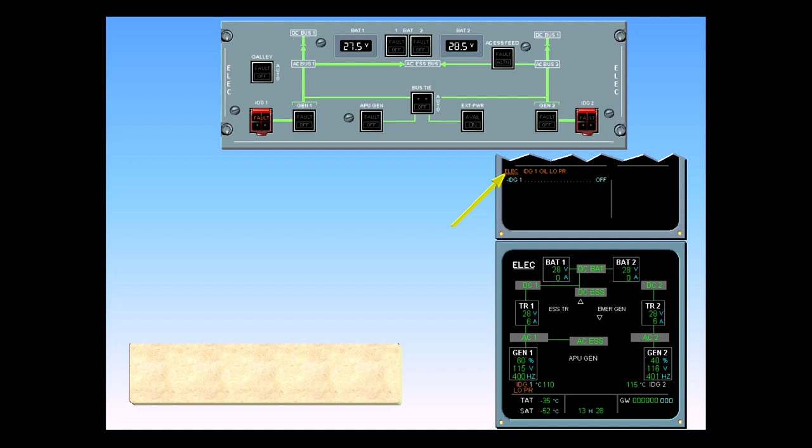Observe the amber IDG low pressure on the Ecam electric page and the amber IDG1 fault light on the electric panel.

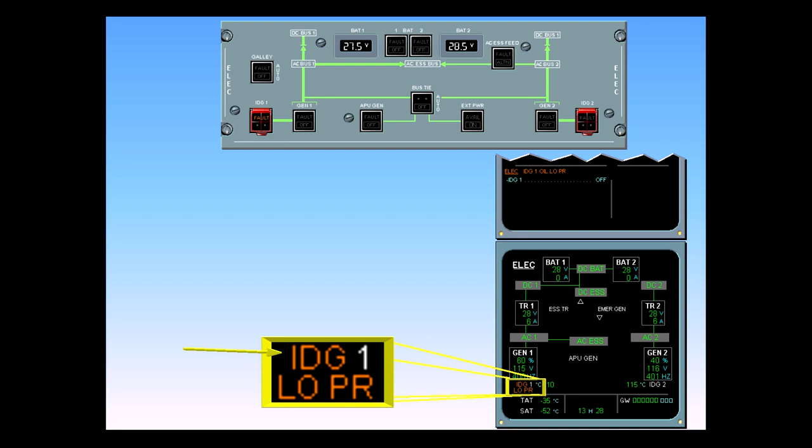These indications mean that there is insufficient oil pressure in IDG1. Ecam action requires us to disconnect the IDG. Begin Ecam action by raising the IDG guard.

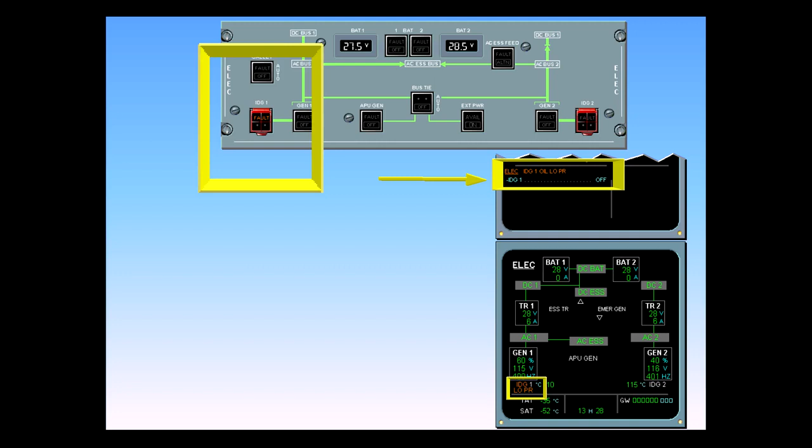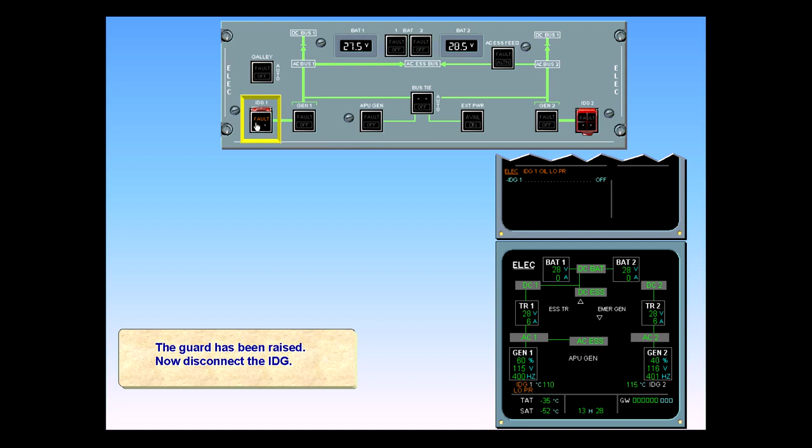The guard has been raised. Now disconnect the IDG. Caution! Press the IDG push-button switch until the generator fault light comes on, but not more than 3 seconds, to avoid damage to the disconnect solenoid.

Generator number 2 has automatically taken over the generator number 1 load through the AC tie bus and is now supplying the entire electrical system.

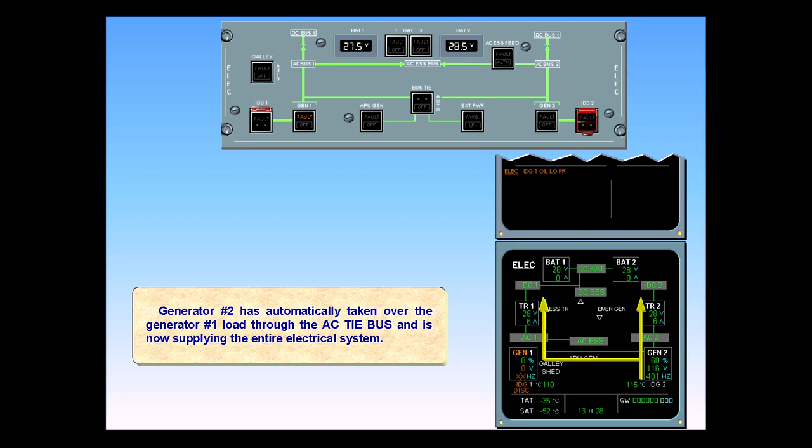On the Ecam electric page, an amber disconnect has replaced the previous low pressure, signifying that IDG number 1 is now disconnected. The IDG number is shown in white to indicate that engine 1 is still running.

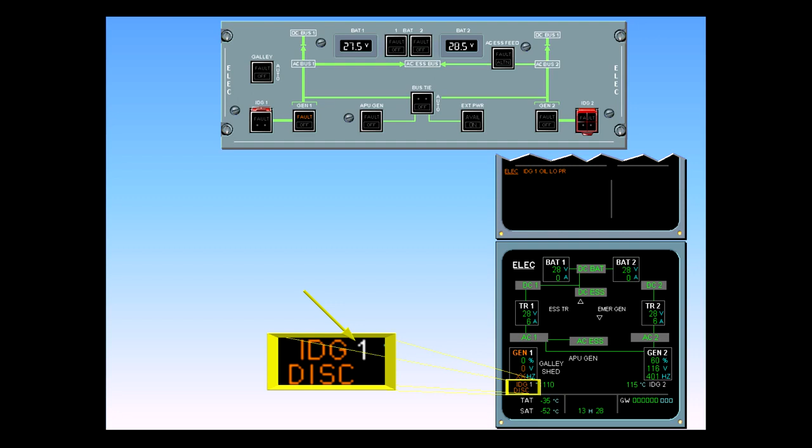Let's look at generator 1 indications for a moment. GEN in amber means generator 1 has abnormal parameters.

One in white means engine 1 is still running. 0% load in green means that the load is still within the normal range.

0 volts in amber means that the voltage is outside normal parameters. Amber X's means that there is no frequency sensed.

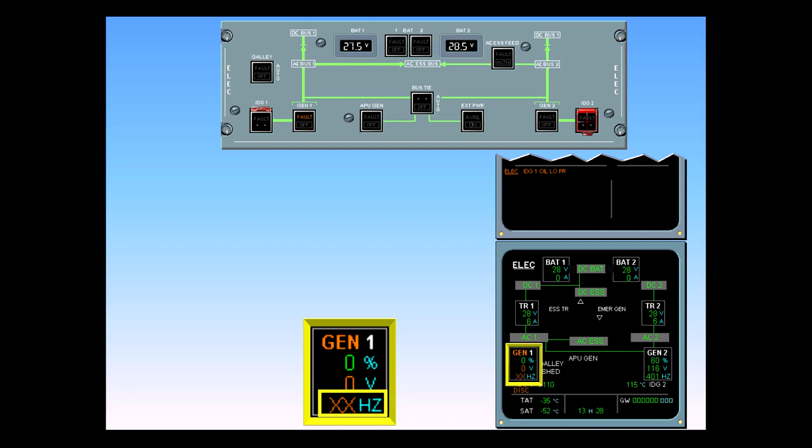The amber fault on the generator 1 push-button switch means generator 1 is not supplying the system.

On the Ecam electric system page, galley shed in white has illuminated, indicating that the system has automatically shed galley equipment to decrease the load on the remaining generator.

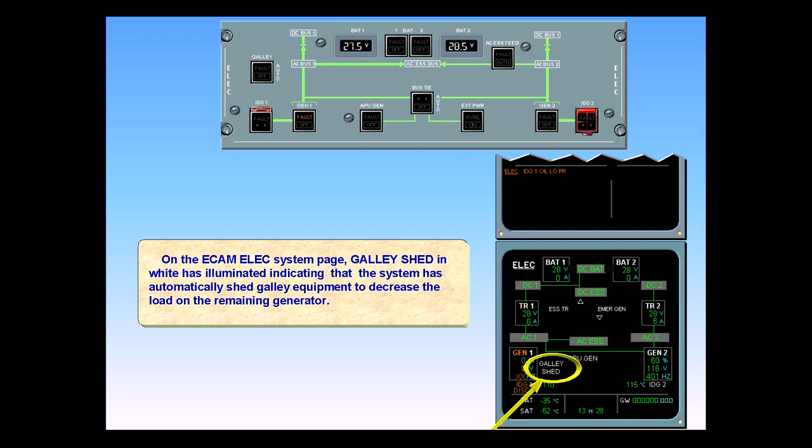After review and confirmation, clear Ecam.

The status page is now displayed. A green message advises us that the APU generator is available as a backup up to flight level 350. Using the APU would restore the galley power.

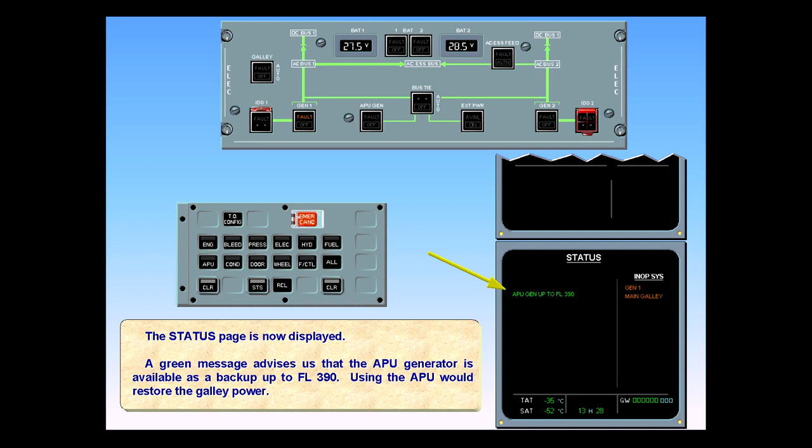In the INOP system column, generator 1 and the main galley are listed as inoperative. After review and confirmation, clear status.

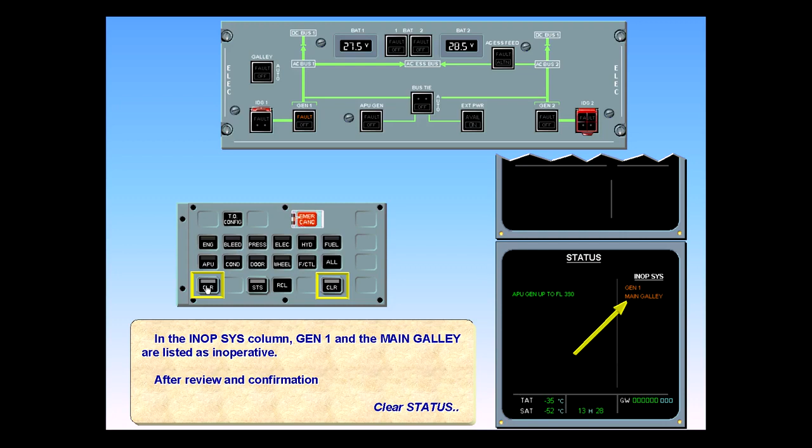Ecam complete, screens normal. The system display has reverted back to the cruise page.

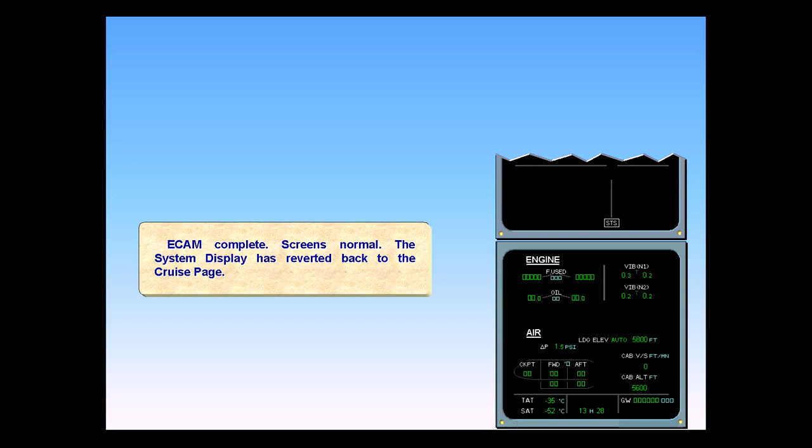On the engine warning display, read the title of the failure.

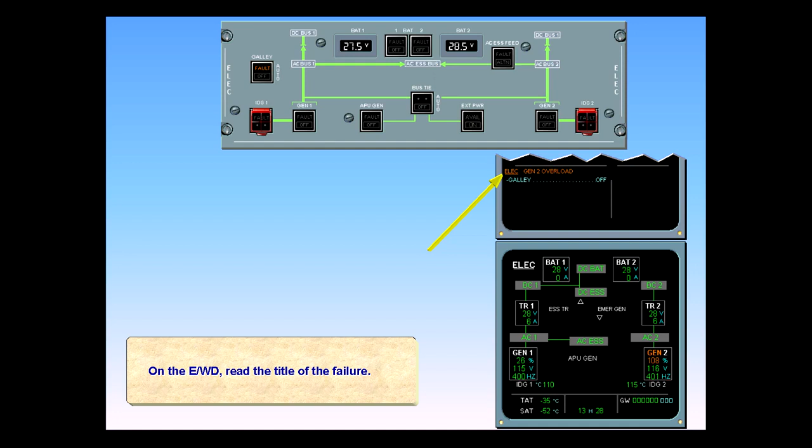Observe generator 2 load indications in amber on the Ecam electric page, indicating that the load is abnormal. Galley fault light illuminated on the electrical panel, helping you to locate the proper switch.

The galley will be switched off to reduce the load. Notice that there is no fault light in the generator 2 push-button switch because the generator is still powering the AC bus 2.

The first Ecam action calls for the galley power to be switched off. Turn off the galley power.

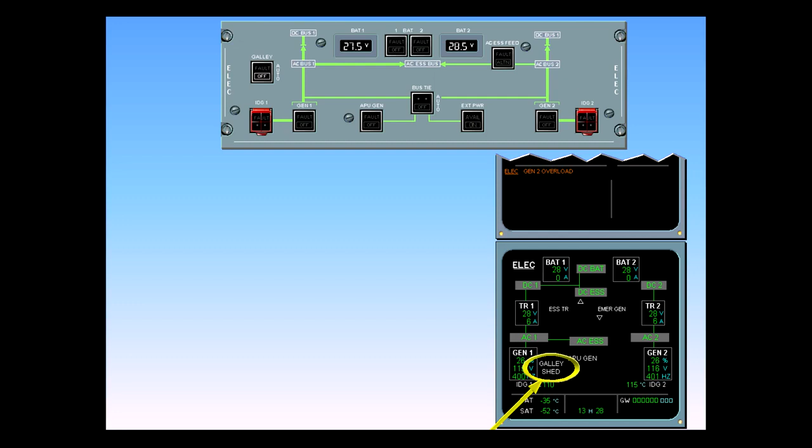On the Ecam electric page, note that galley shed indication has appeared. Generator 2 load is back to a normal value.

After review and confirmation, clear electric.

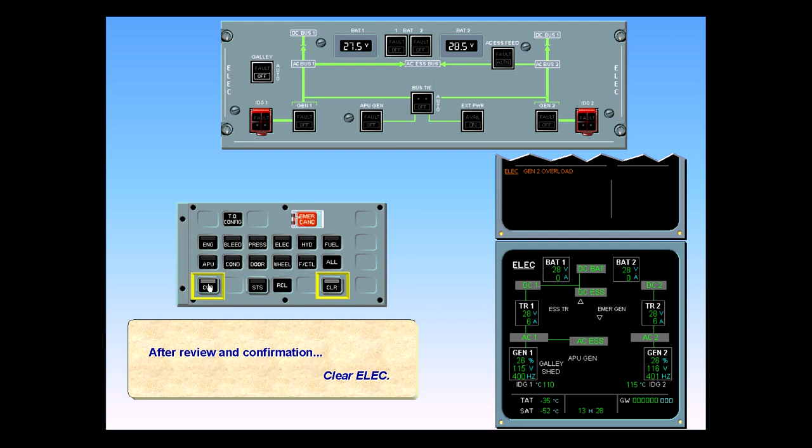The status page is displayed for review. The only inoperative item is the galley.

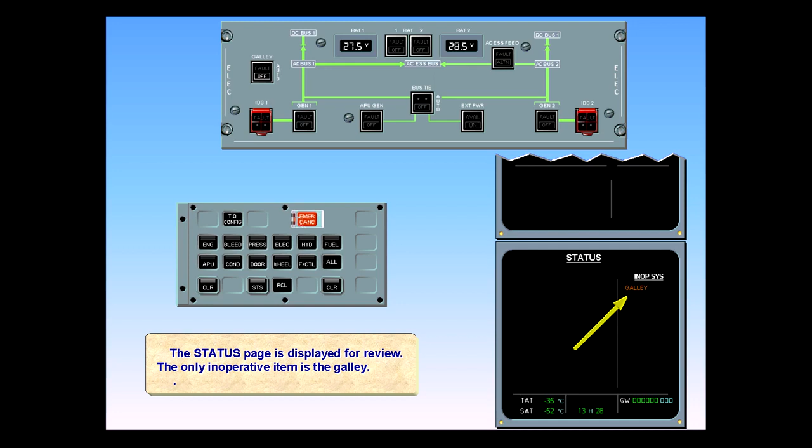After review and confirmation, clear status.

Ecam complete. Screens normal. The system display has reverted back to the cruise page.

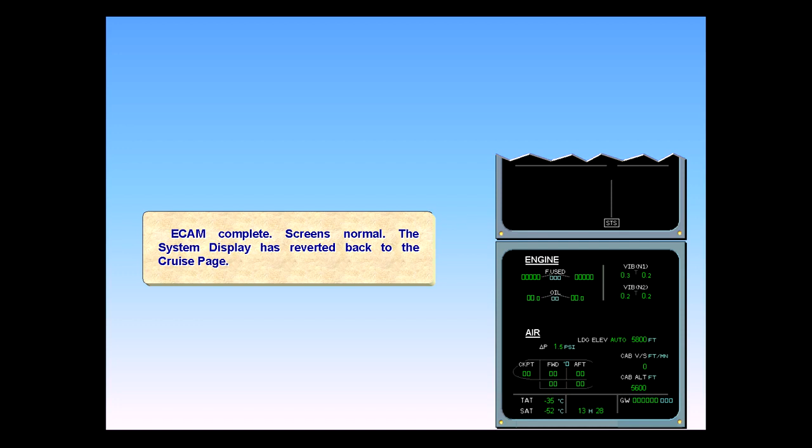This is a serious failure which results in a master warning.

Normally, AC Bus 1 supplies the following: the AC Essential Bus, DC Bus 1, which in turn feeds the DC Battery Bus, the DC Battery Bus, which normally feeds DC Essential.

If AC Bus 1 is lost, these buses become unpowered.

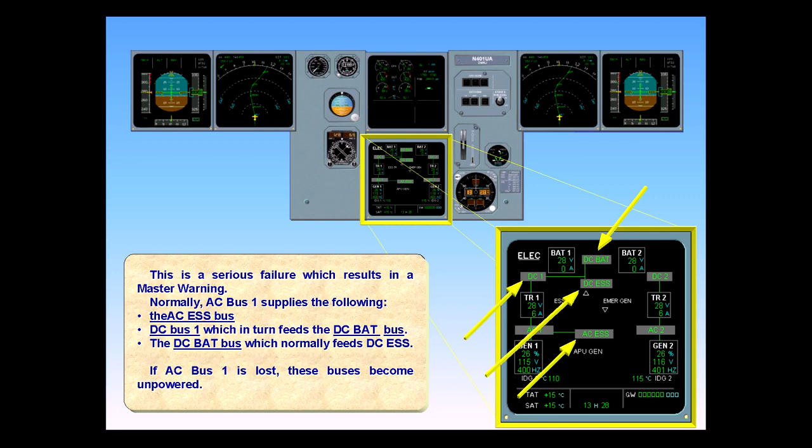When power is lost to either DC bus, the DC tie bus relay automatically closes and repowers the dead bus. In this case, both DC1 and the DC battery bus are repowered by TR2 through DC2.

However, with the loss of AC Bus 1, AC Essential and DC Essential both remain unpowered.

The most noticeable consequence is that the captain's PFD, ND, and the engine warning display go blank. Since the captain has no instruments, he should give the aircraft to the first officer and perform the Ecam himself.

The EWD and the Ecam checklists are now displayed on the lower Ecam. The first item is the autopilot.

It can be cleared either by clicking twice on the autopilot disconnect on the side stick or by using the clear key on the Ecam control panel.

For this exercise, use the clear key. Clear auto flight.

The first item, autopilot, has disappeared. Looking at the remaining lines, we can see that the AC Bus 1 fault has led to AC and DC Essential Bus failures.

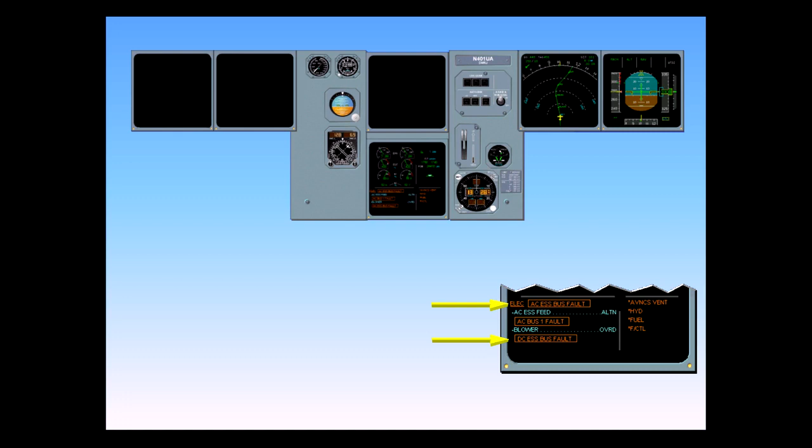The first blue line in the procedure tells us to switch AC Essential Bus from AC Bus 1 to AC Bus 2. This will repower the AC Essential Bus.

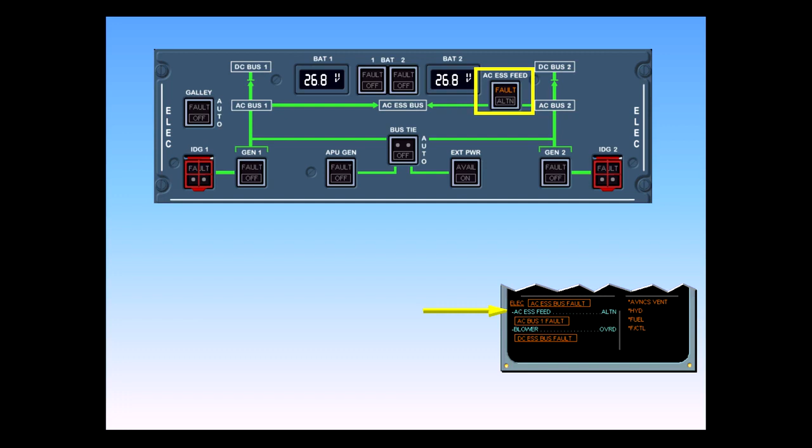At that point, AC Essential will power the Essential TR, which will in turn repower the DC Essential Bus.

Note the amber fault light in the AC Essential feed switch. This amber light is also telling us to operate the switch. Perform Ecam action.

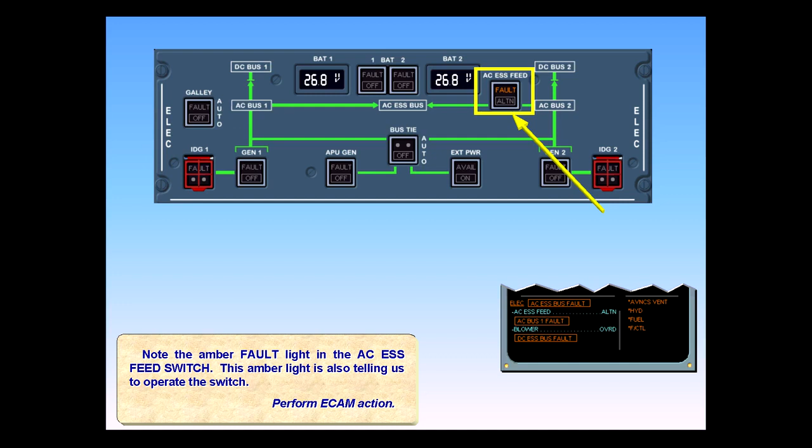The amber fault light has now been replaced by a white alternate light. This means that the AC Essential Bus is now powered by its alternate source, AC Bus 2.

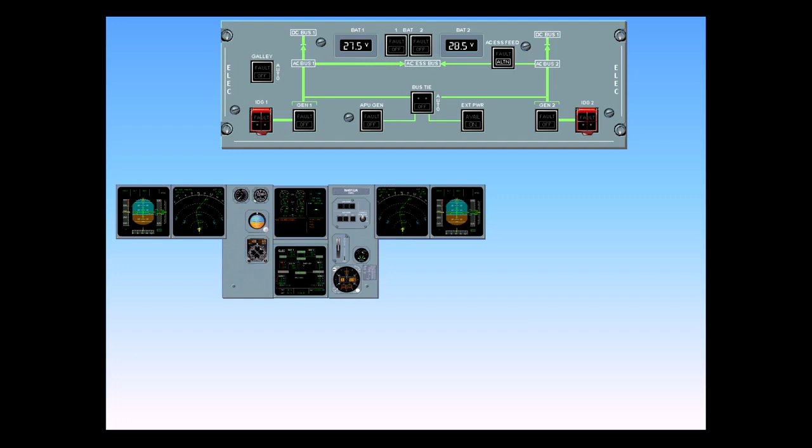After a few seconds, the captain's PFD and ND and the EWD are recovered. The Ecam electric page is then automatically redisplayed on the lower Ecam.

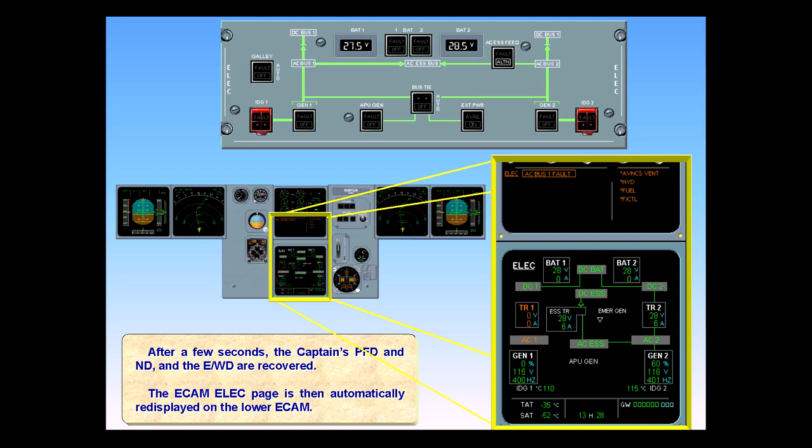Both essential buses are now recovered. AC Bus 2 is now supplying the AC Essential Bus, which in turn is powering the Essential TR. The Essential TR then powers the DC Essential Bus.

In normal operation, the Essential TR is unpowered. Although it is labeled, the box symbol has no parameters listed. Now that it is in use, it's showing both volts and amps.

As long as these parameters are in the normal range, they will be displayed in green. Should one or both become abnormal, the display will change to amber.

The only bus which remains unpowered is AC Bus 1.

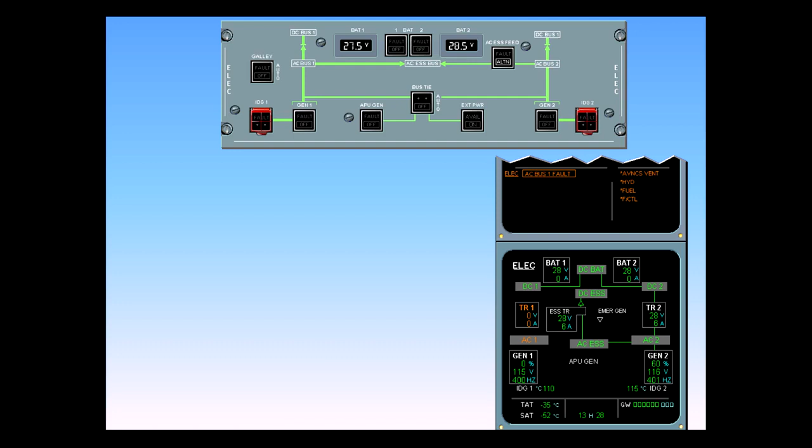Listed on the right side of the EWD in the memo area are those systems affected by the loss of AC bus number 1. At this point, you will clear the electric page. Clear electric.

Normally, at this point you will start to review the Ecam pages relative to the secondary failures: avionics, ventilation, hydraulics, fuel, and flight control pages. However, we will bypass the rest of the procedure since those pages relate to different systems.

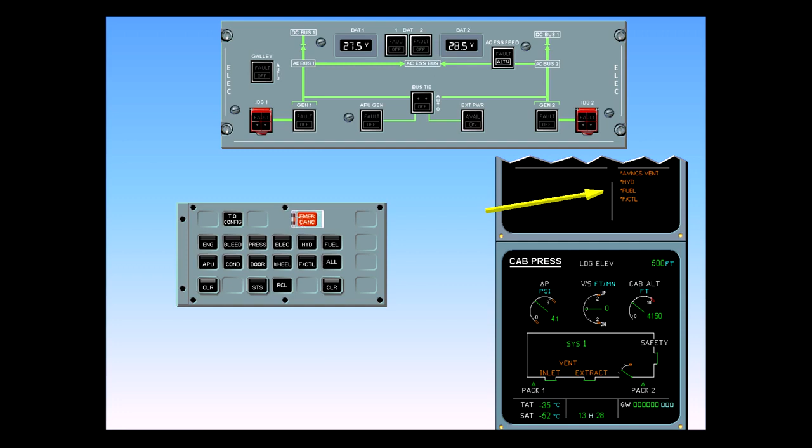We will now study the electrical emergency configuration. As there are a lot of events which happen at the same time in the aircraft, we will present them in a sequential order. Let's assume we are in flight and no previous faults have occurred.

The RAT automatically extends if both AC buses 1 and 2 lose electrical power above 100 knots, unless the aircraft is on the ground.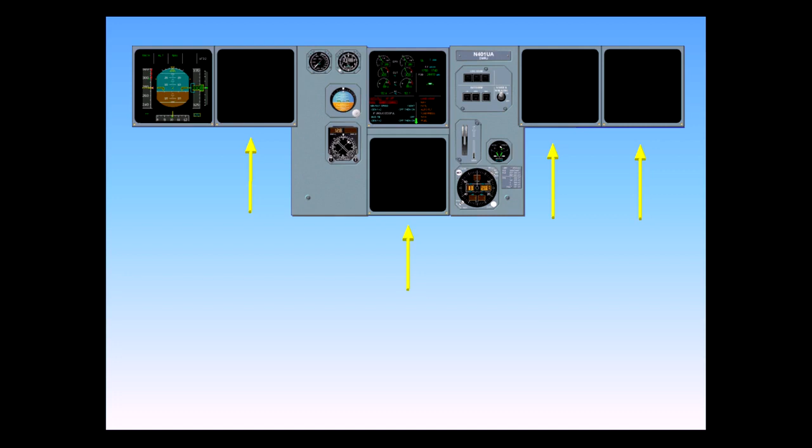The SOPs recommend in such a case that the captain will fly the aircraft, while the first officer does the ECAM action.

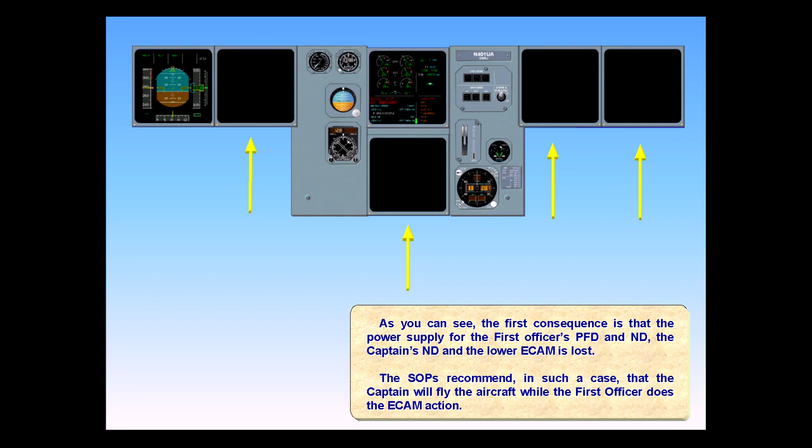First, let's look at the sequence of events regarding the various electrical configurations during RAT operation on the A320.

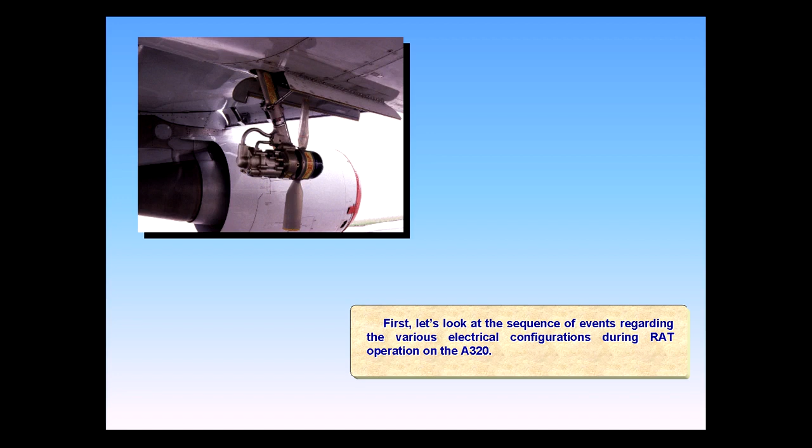During RAT extension, Battery 1 powers AC Essential through the static inverter. Battery 2 powers DC Essential directly. The shed buses are not powered.

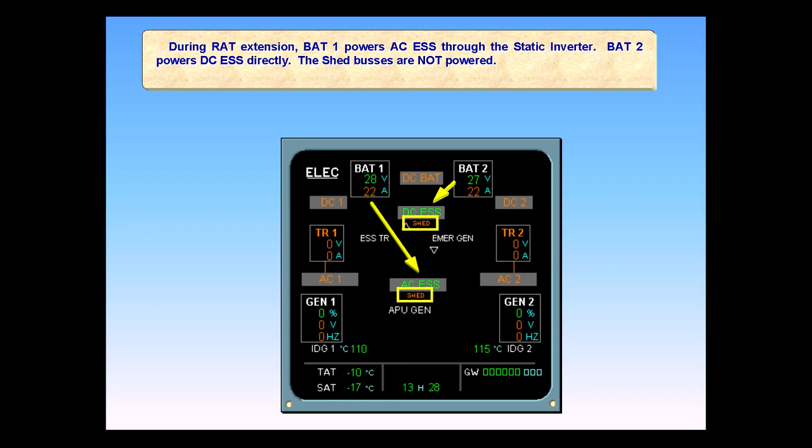After the RAT has extended and the nose gear is up and locked, AC and DC Essential and AC and DC Essential shed buses are powered.

On the 320 only, when the gear is extended, the RAT generator drops offline and the batteries again power AC and DC Essential. The shed buses again are not powered.

Note, on the 319 and the newer 320s, the RAT generator remains powered even after gear extension down to 125 knots on the ground.

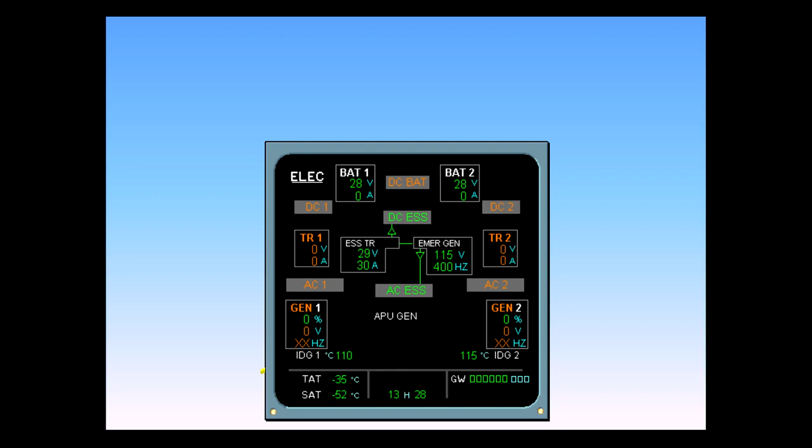On the ground below 100 knots, both batteries automatically connect to the DC battery bus. Below 50 knots, AC Essential is no longer powered, and the CRTs are lost. Only DC Essential remains powered, providing communication capability.

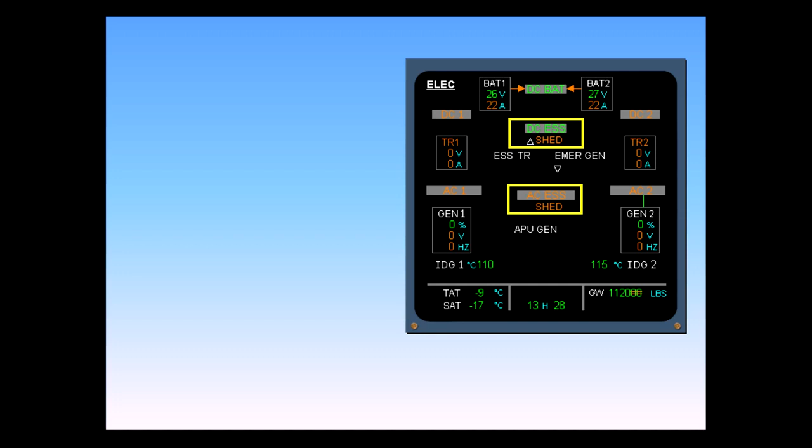We will now look at cockpit and ECAM indications during the emergency electrical configuration.

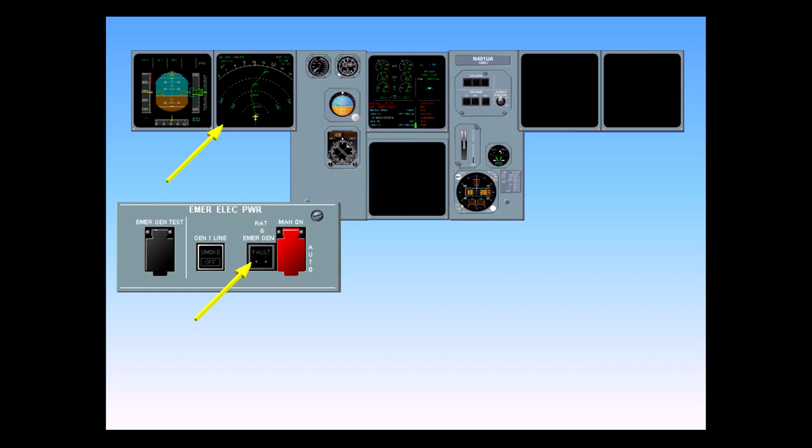The light has extinguished and the emergency generator is now supplying the system. Notice that the captain's ND has been restored. Several important items are restored with the operation of the emergency generator: the captain's ND, MCDU, DME, ADF, and the transponder.

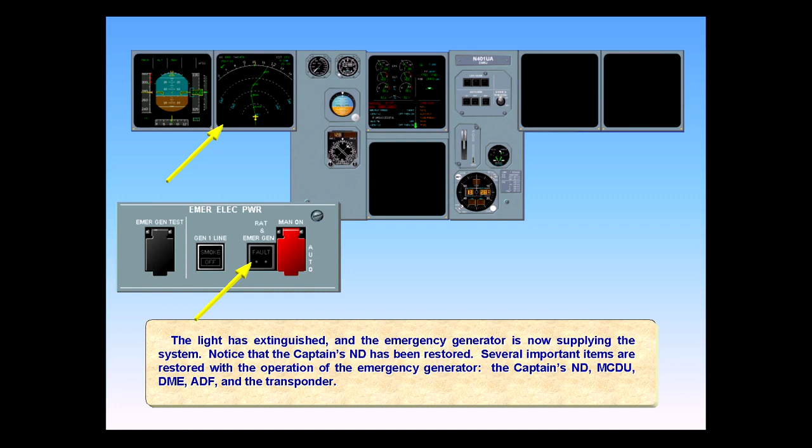The first line on the EWD deals with the autopilot. To continue with the procedure, you must first clear this line. Clear autoflight.

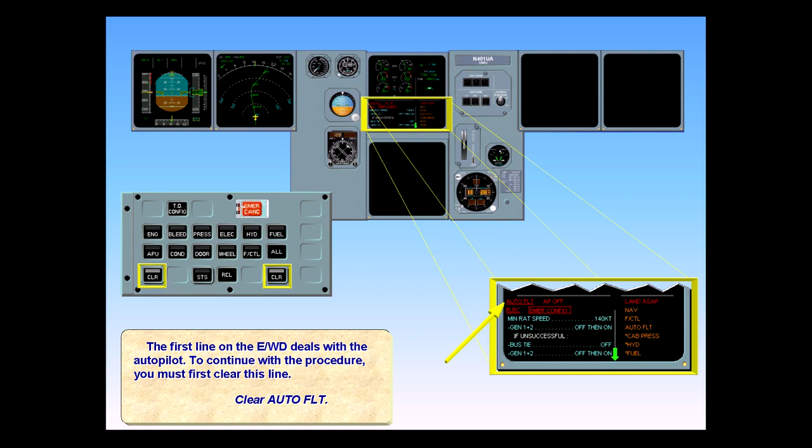Read the title of the failure. The red Emergency Config title means that you are in an electrical emergency configuration.

Note the red message in the memo portion of the Ecam: land ASAP. Both generators have been lost.

The only electrical power available right now is the RAT and the batteries. Therefore, it is recommended that a landing be made with reasonable haste.

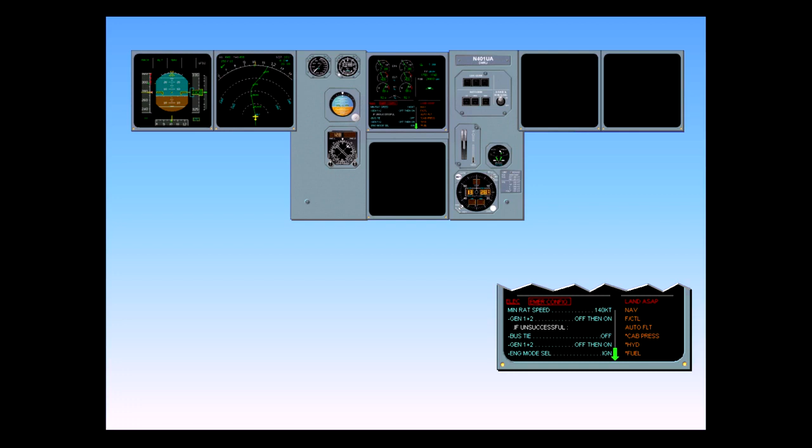Note the minimum speed of 140 knots with the RAT extended. Below this speed, the RAT will stall, leading to the aircraft being supplied by batteries only.

The first action is an attempt to reset the generators.

The reset has not been successful. Before continuing, let's review the Ecam system. Should any one Ecam screen be lost, the priority is to the EWD.

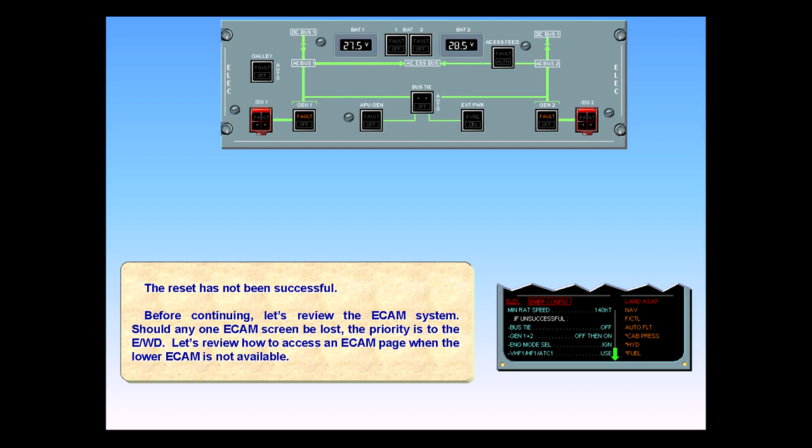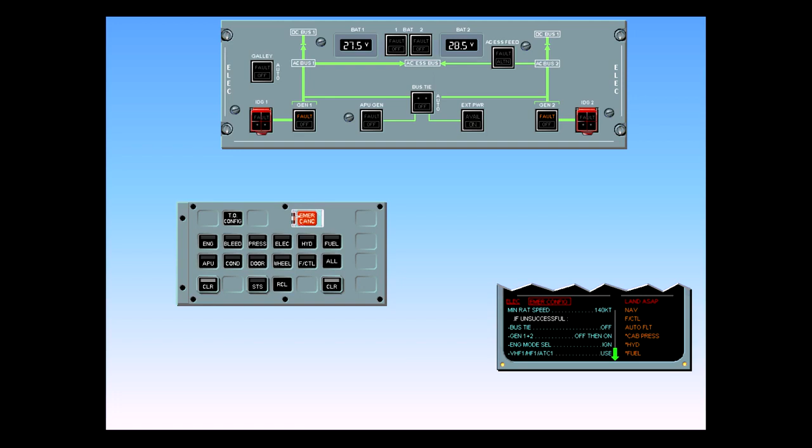Let's review how to access an Ecam page when the lower Ecam is not available. An Ecam page can be displayed on the upper Ecam by pressing and holding its associated push-button switch on the Ecam control panel. The switch must be held, otherwise the display will revert to the engine warning display. Call the Ecam Electric page.

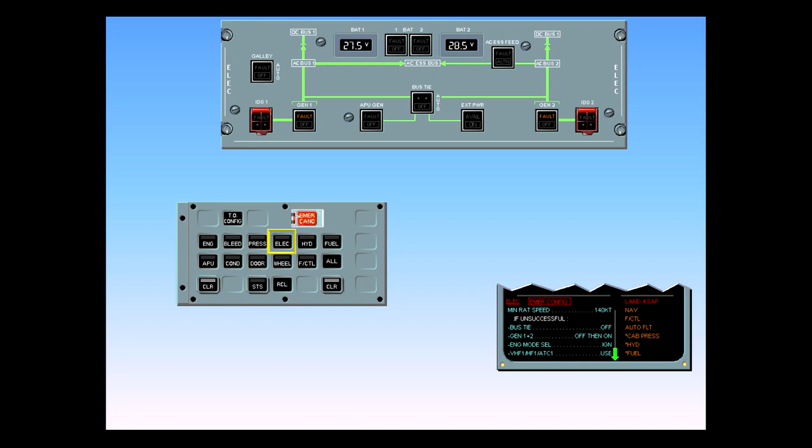On the electric page, note that the emergency generator supplies the AC essential bus, the essential TR, and the DC essential bus.

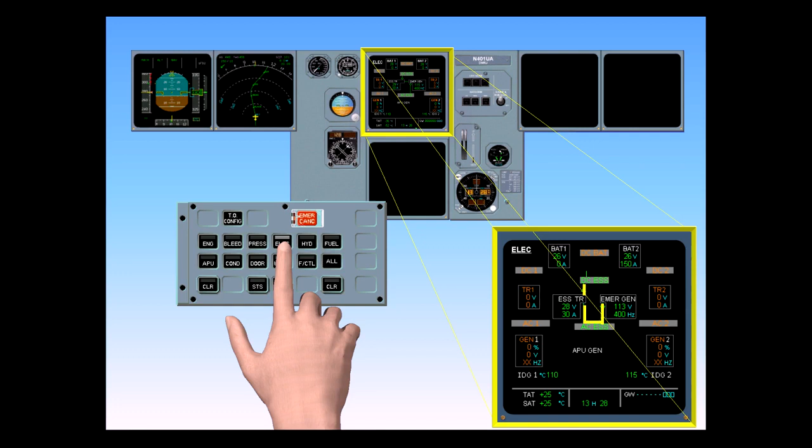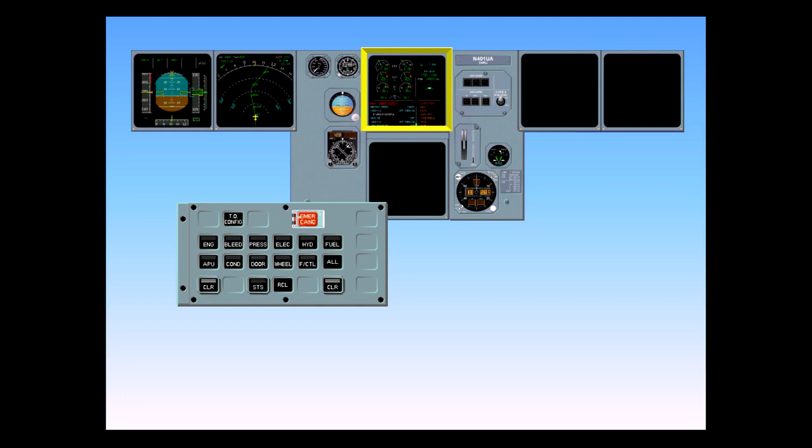By releasing the Ecam electric push button, the engine warning display is again displayed on the upper Ecam.

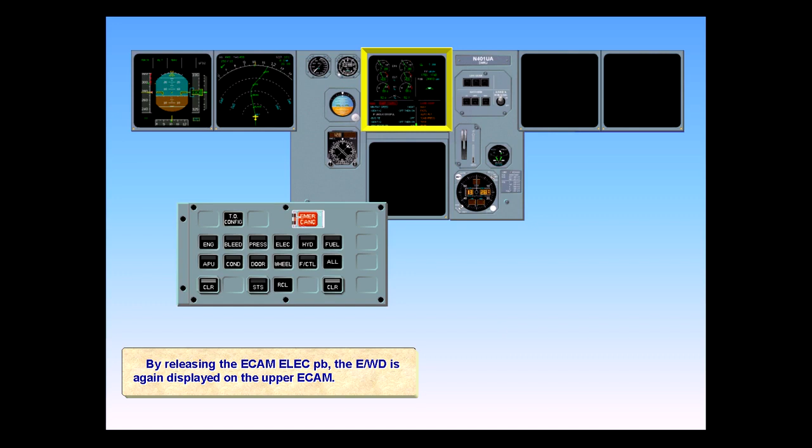Because the generator reset was not successful, we must continue with the procedure. The next item requires us to switch off the bus tie. Continue Ecam action.

Switching the bus tie off segregates the two sides of the system. In this manner, a short circuit can be isolated, thus allowing at least one generator to be reset. The procedure then calls for another reset of the generators.

Again, the reset of the generators has not been successful. Since the next steps concern other systems, we will stop here and look at the indications on the right side of the EWD.

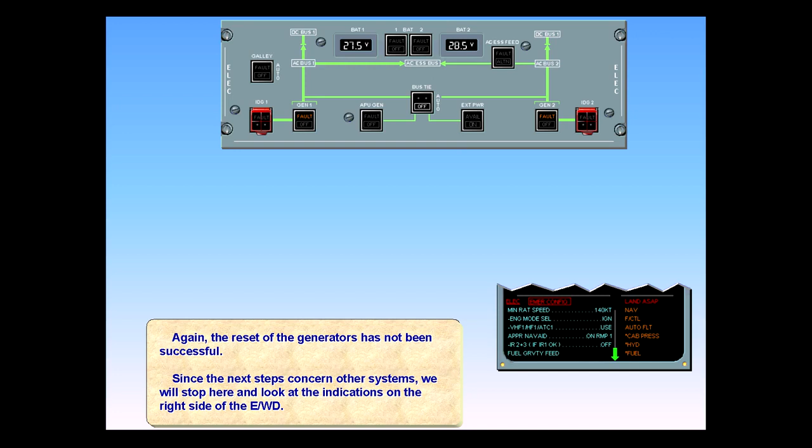Notice the amber nav, flight control, and auto-flight system titles. These systems are also affected by the failure. Their related procedures are stacked after the current one and will appear with the completion of the emergency configuration procedure.

Notice also the secondary failures concerning cabin pressure, hydraulic, and fuel systems. There may be other secondary failures that are not yet displayed, since there is an overflow indication, green arrow.

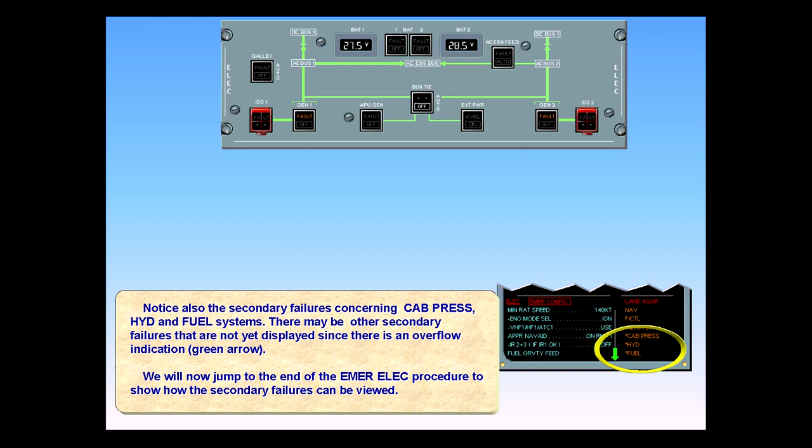We will now jump to the end of the emergency electric procedure to show how the secondary failures can be viewed. The list of secondary failures is visible.

Since the lower Ecam is not available, you must manually call the Ecam pages associated with the secondary failures on the EWD. Press and hold the related key on the Ecam control panel, ECP, in the same way that you previously called the Ecam electric page.

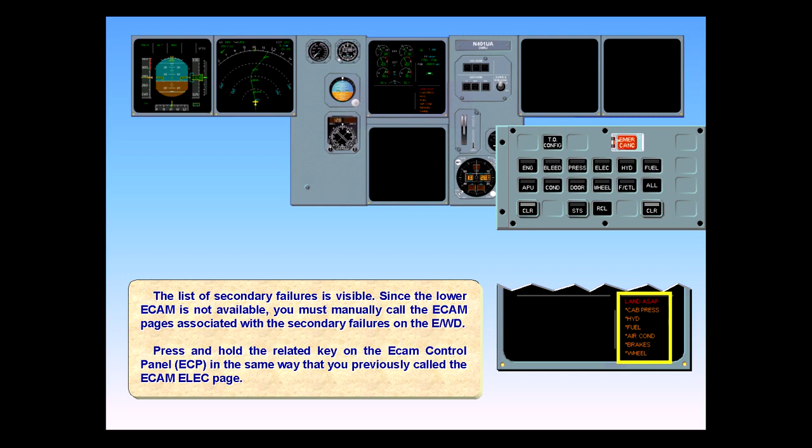We will now assume that all the Ecam pages of the secondary failures have been reviewed. When you cleared the last failure, the memo section was restored to normal. Note that there are now 5 memos that serve as reminders about systems that do not normally operate in this manner.

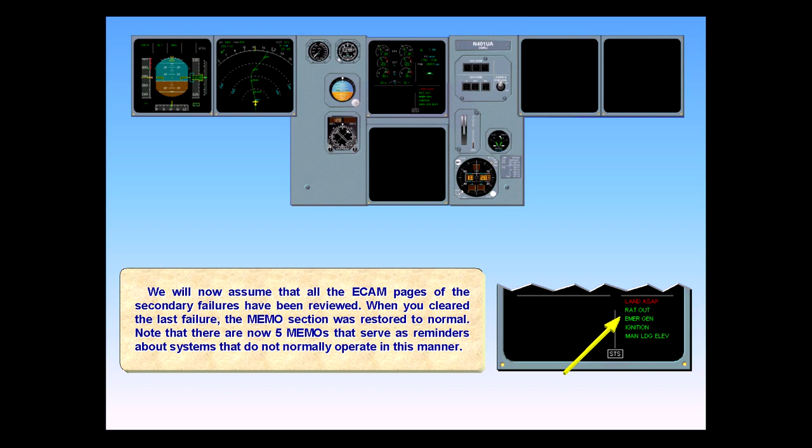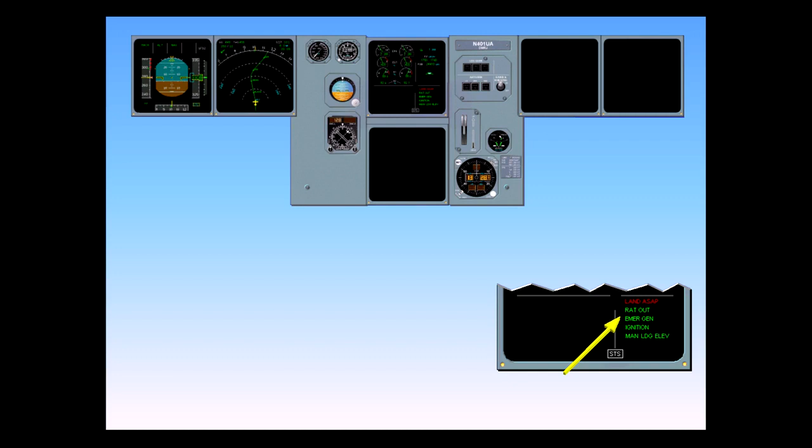In particular, the green Rat Out memo message confirms that the rat is no longer stowed, and the green emergency generator memo message indicates that the emergency generator is supplying the system.

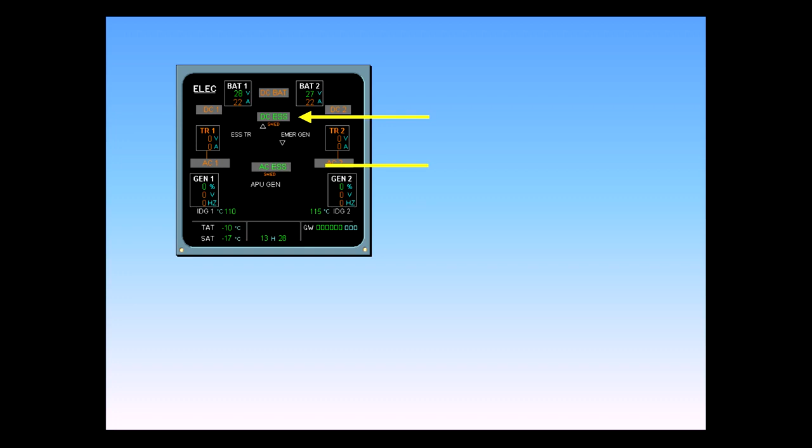The batteries feed the DC essential bus and, via the static inverter, the AC essential bus. Note that both buses are labeled in green, indicating that they are powered.

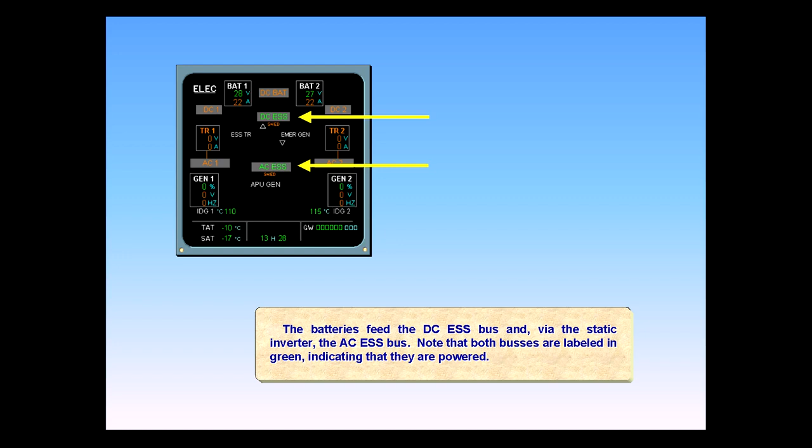Both shed essential buses are automatically depowered, indicated by the amber shed indications below their respective buses.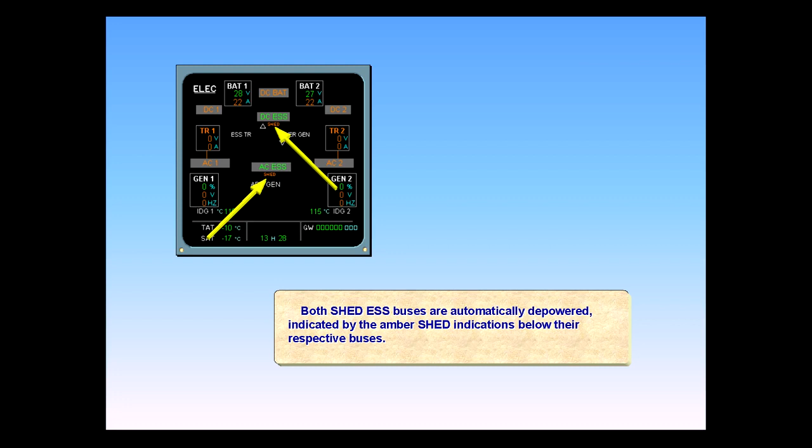If a dual electric failure occurs, the rat is automatically deployed. During the rat extension, about 5 seconds, the electrical system is powered from the batteries. The approximate flight time on batteries only is 30 minutes.

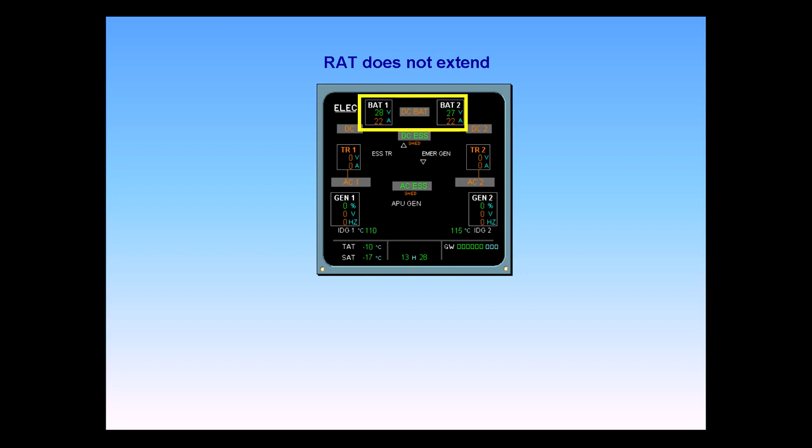If the rat fails to extend, a specific message appears in the emergency electric procedure telling you to manually extend the rat on the emergency electric power panel. First, raise the guard. The guard is up. Now extend the rat.

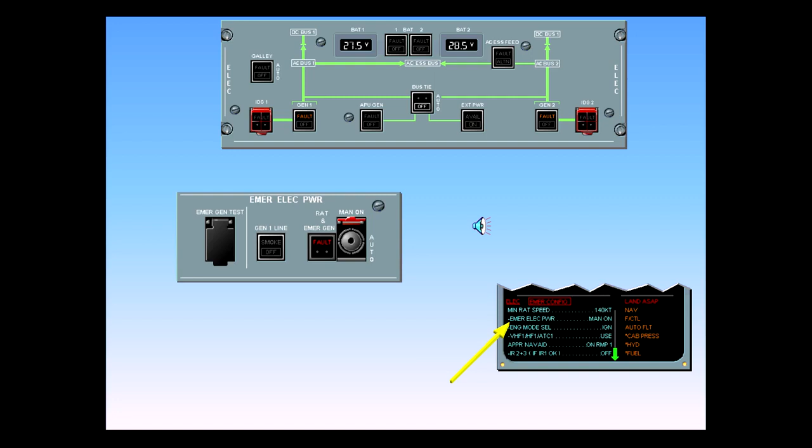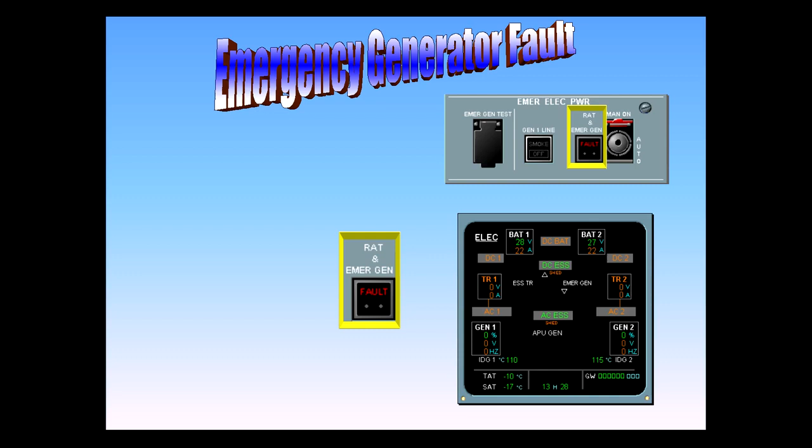After a rat extension, if the emergency generator is not working, the red fault light stays illuminated on the rat and emergency generator indicator. This failure causes the aircraft to be powered only from the batteries. The approximate flight time on batteries only is 30 minutes.

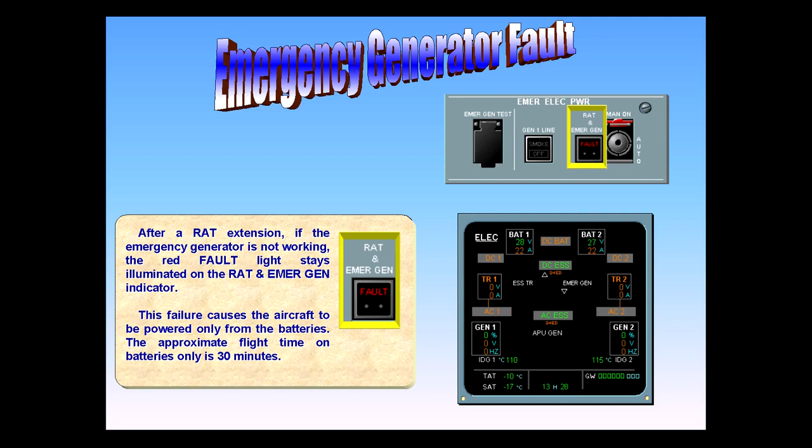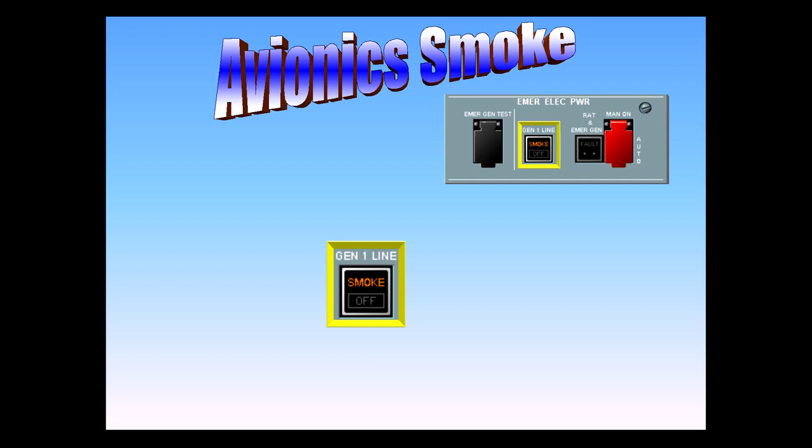Should smoke be detected in the avionics bay, the amber smoke light illuminates on the generator 1 line push-button switch. A master caution and an Ecam procedure are also triggered.

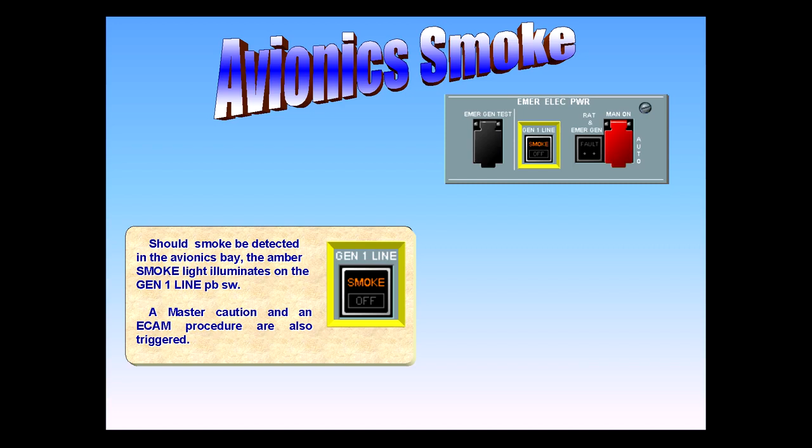When the generator 1 line push-button switch is pressed, generator 1 is disconnected from AC bus number 1 and is connected directly to a fuel pumps bus, which powers the number 1 fuel pump in each main tank.

The avionics smoke ECAM procedure leads to the shedding of the main buses. In this case, the electrical system configuration is the same as in emergency, except for the fuel pumps, which remain supplied.